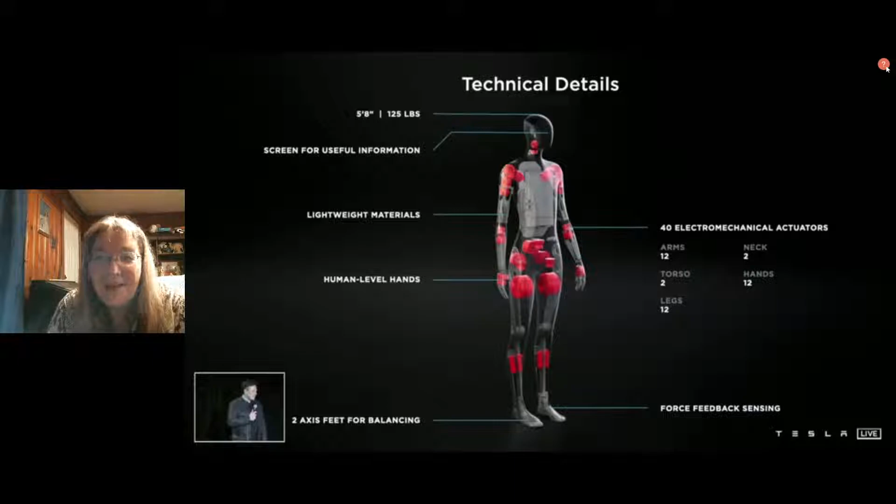It has a screen where the head is for useful information, but it's otherwise basically got the autopilot system in it. So it's got 8 cameras.

Full self-driving computer, making use of all of the same tools that we use in the car. Things I think are really hard about having a useful humanoid robot: can it navigate through the world without being explicitly trained, without line-by-line instructions? Can you talk to it and say, please pick up that bolt, attach it to the car with that wrench, and it should be able to do that. It should be able to go to the store and get groceries, that kind of thing, or put down the knife. So yeah, I think we can do that.

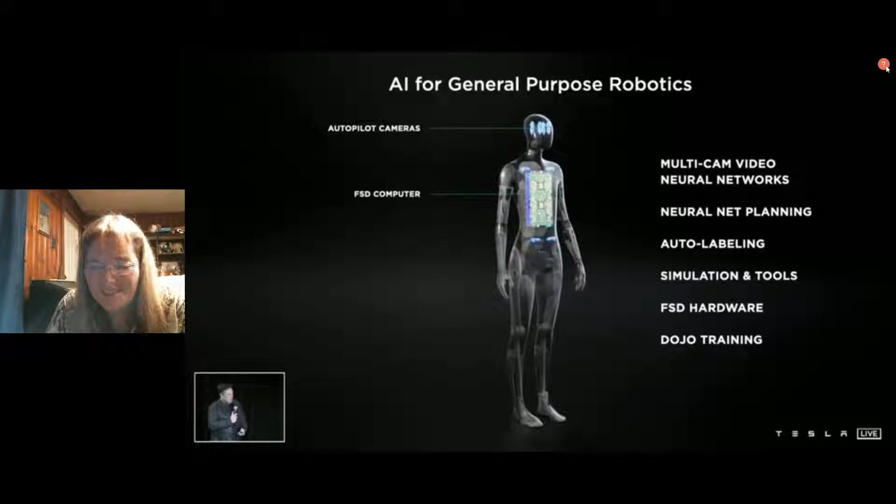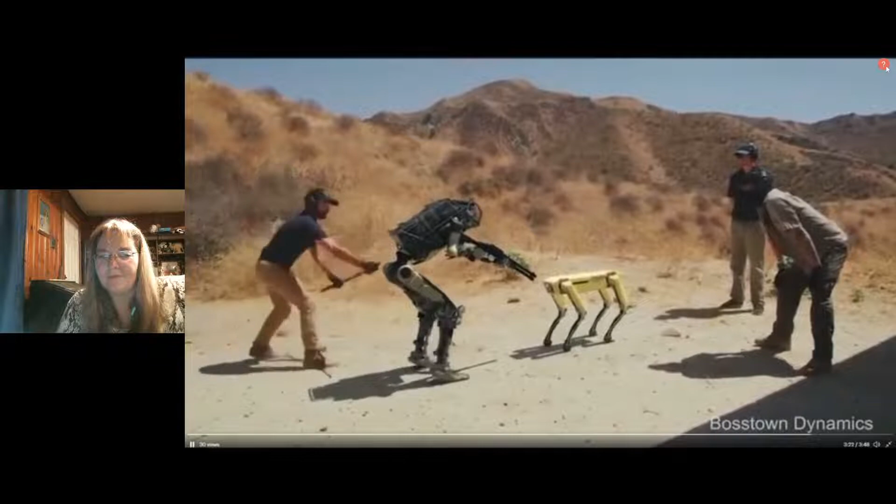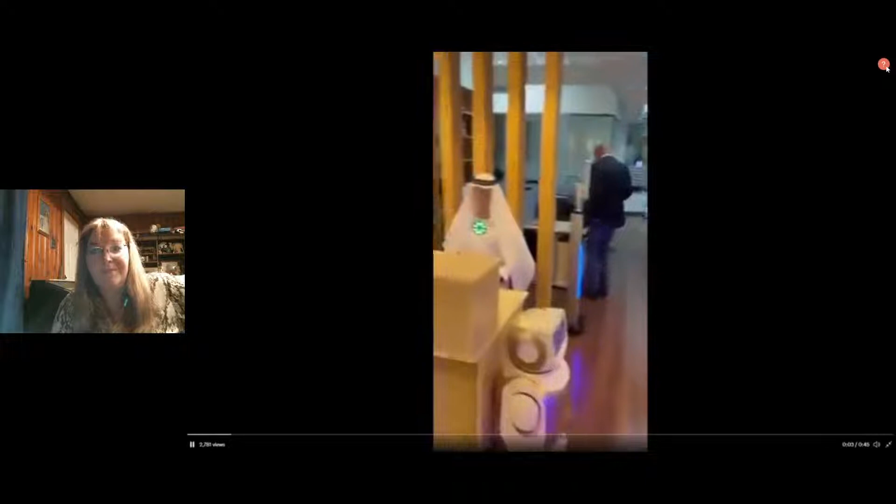Hello, guys, great to see you, my friend. Whoa, whoa, whoa, what is your name? Mister, what is your name? Did you hear that? He looks cross-eyed. Okay, what is your name? You can call me pretty boy. Pretty boy.

A lot of awesome robots.

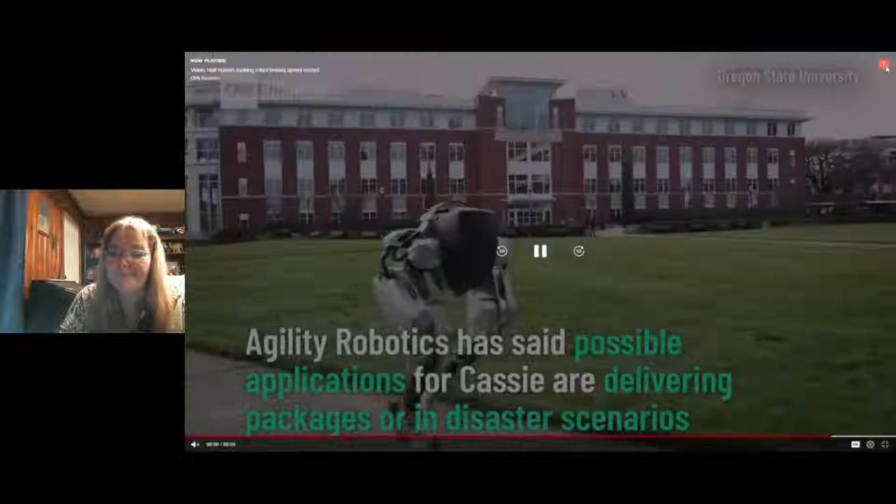So far below them in intelligence that it would be like a pet, basically, like a cat, like a house cat. So honestly, that would be the benign scenario. I don't love the idea of being a house cat. But that, so what's the...

Bear with me, is it going? Let's see, if I stop recording, it might stop some stuff from happening. Is it working yet? Let me just go here. See what it's doing. Uh-oh, yep. Oh, okay, here he is. Okay, let me go to speed 1.25. He is coming on live now, so we'll watch the rest of mine in a minute.

Looks like a bunch of young people, mind controlled college kids. All right, welcome everybody. Let's give everyone a moment to get back in the audience.

It says I love you. All right, I knew it. Welcome to Tesla AI Day 2022. Let me have it bring you some flowers. We've got some really exciting things to show you. I think you'll be pretty impressed.

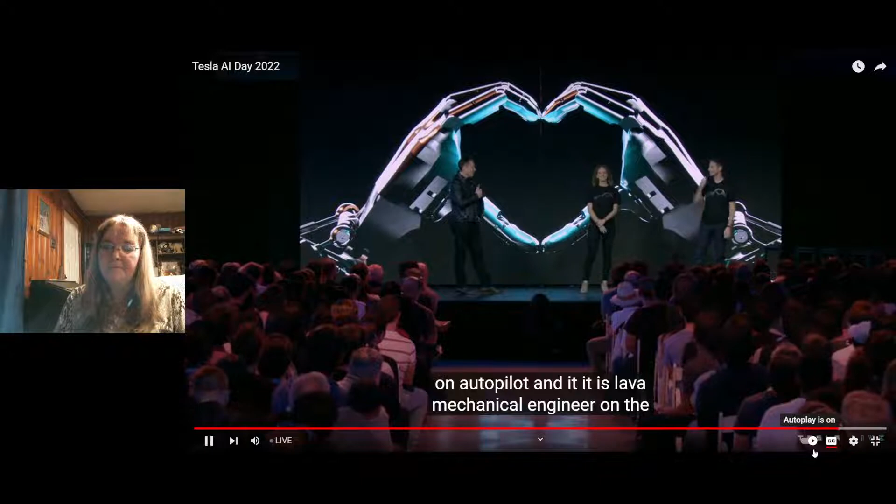So let's see, with that, do you guys want to say anything? Hey guys, I'm Milan, I work on Autopilot and the Tesla bot. And I'm Lizzie, mechanical engineer on the project as well. Okay, so should we bring up the bot?

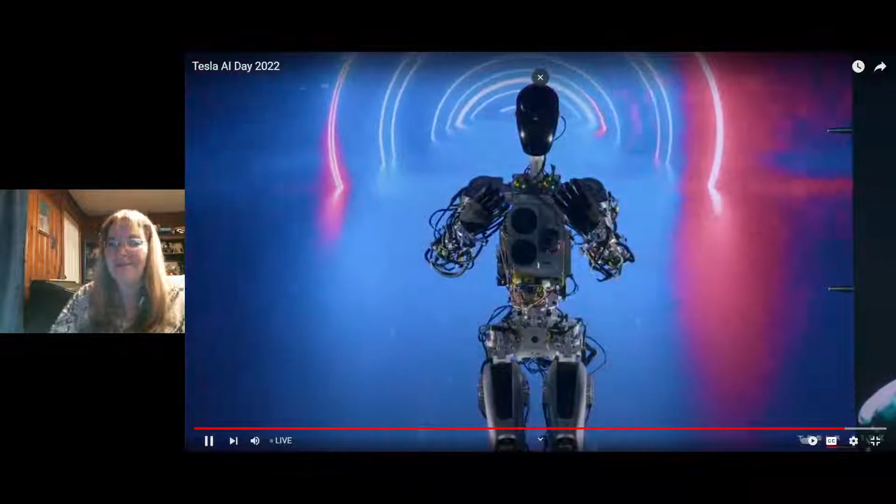Before we do that, we have one little bonus tip for the day. This is actually the first time we try this robot without any backup support - no cranes, mechanical mechanisms, cables, nothing. I want to do it with you guys tonight, but it's the first time, so let's see. You ready? Let's go. Okay, I'm gonna put it in normal time here. That's it. Creepy.

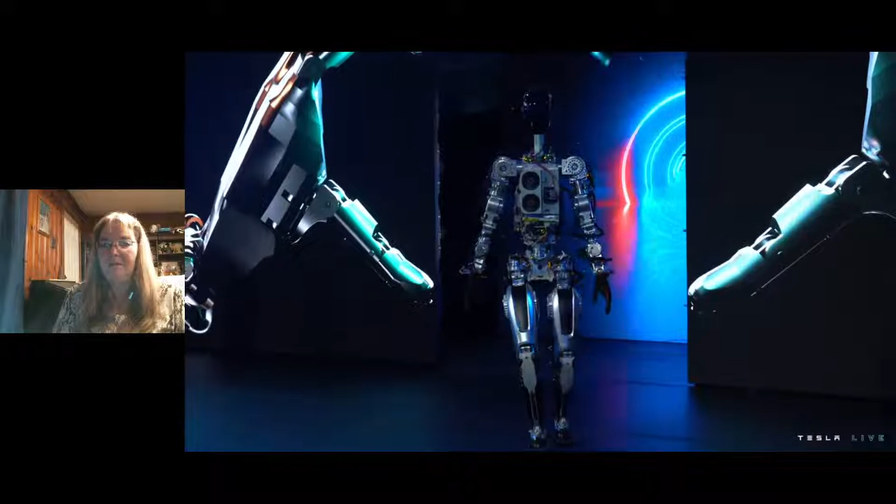Can we put some clothes on it? They're joking us. I think the bot got some boobs too.

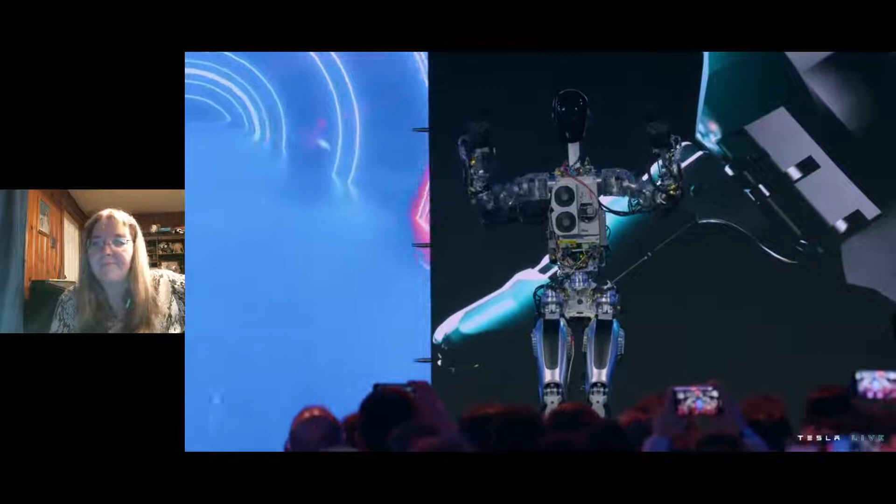I think they just slowed it down. This is essentially the same full self-driving computer that runs in your Tesla cars, by the way.

This is literally the first time the robot has operated without its tether. It was on stage praying tonight. Mantis. I'm creeped out.

So the robot can actually do a lot more than we just showed you. We just didn't want it to fall on its face. So we'll show you some videos now of the robot doing a bunch of other things.

Which are less risky. We should close the screen, guys. Come on, you've seen Boston Dynamics, right? Come on.

Yeah, we wanted to show a little bit more what we've done over the past few months with the bot, just walking around and dancing on stage. So in other words, you're not doing as good as Boston Dynamics.

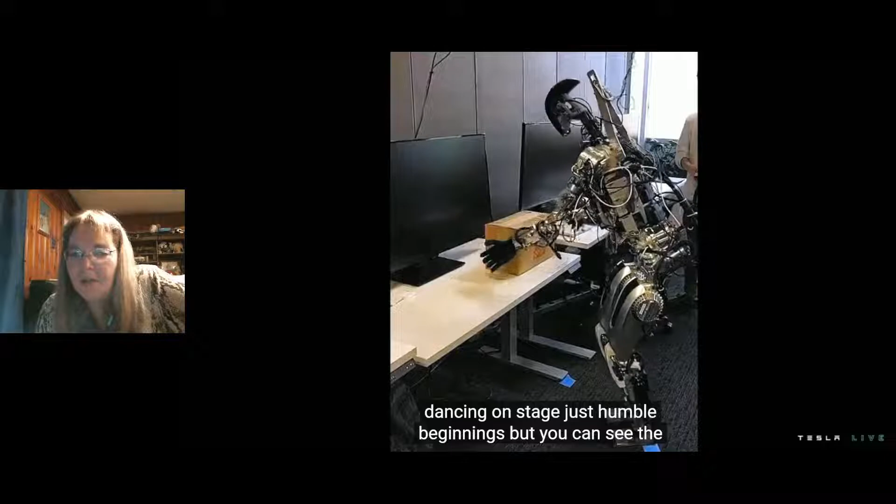Just humble beginnings, but you can see the autopilot neural networks running as is, just retrained for the bot directly on that new platform. That's my watering can.

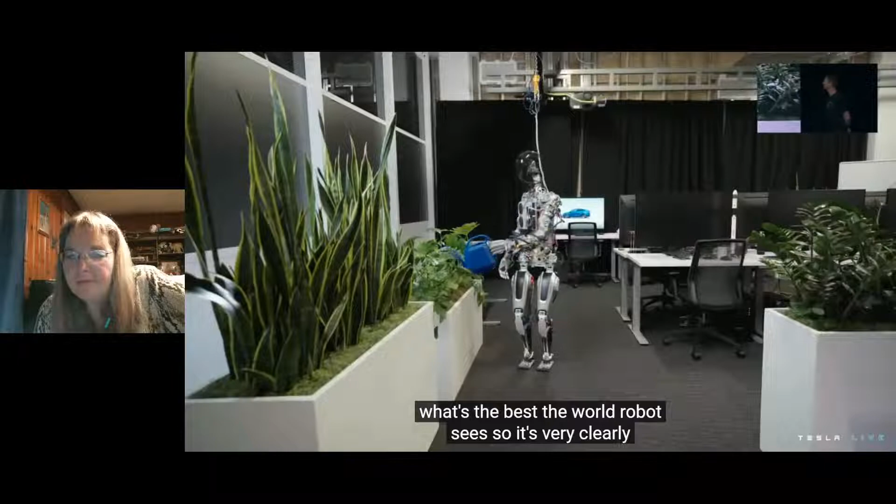Yeah, when you see a rendered view, that's the robot. That's the world the robot sees. So it's very clearly identifying objects. Like this is the object it should be picking up.

What are you guys saying? What do you think? We use the same process for autopilot to collect data and train neural networks that we then deploy on the robot.

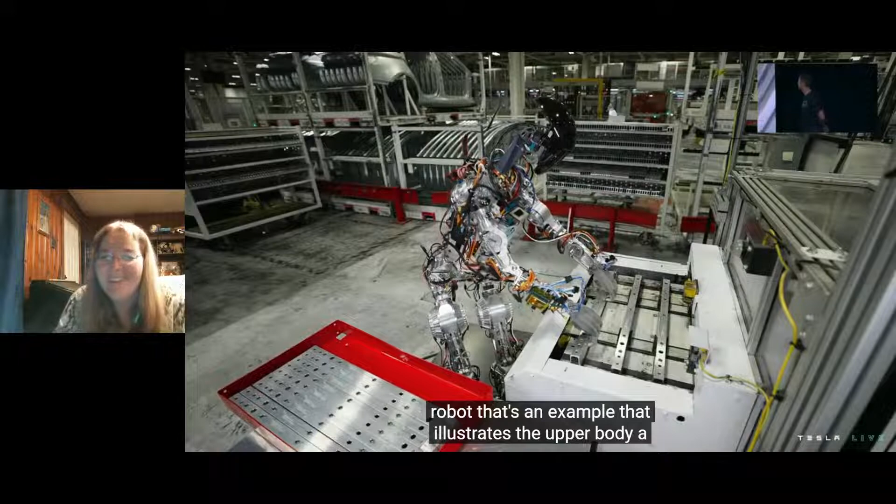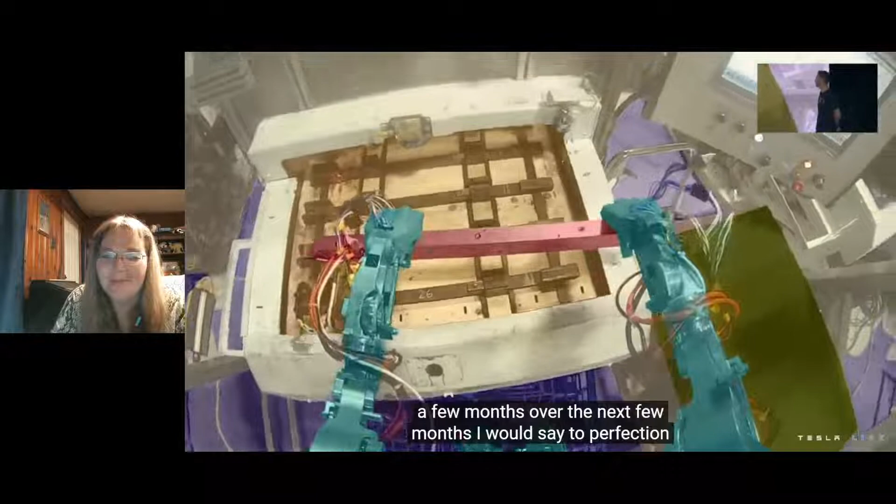Yep. So. Is that it? And that's not the only thing we have to show today, right? Yeah, absolutely.

What you saw was what we call Bumble C. That's our sort of rough development robot using off-the-shelf actuators. But we actually have gone a step further than that already.

The team's done an incredible job. And we actually have an Optimus bot with fully Tesla-designed and built actuators, battery pack, control system, everything. It wasn't quite ready to walk, but I think it will walk in a few weeks. But we wanted to show you the robot, something that's actually fairly close to what will go into production, and show you all the things it can do.

So let's bring it out. Do it. Okay, well now at least it's got a shirt on.

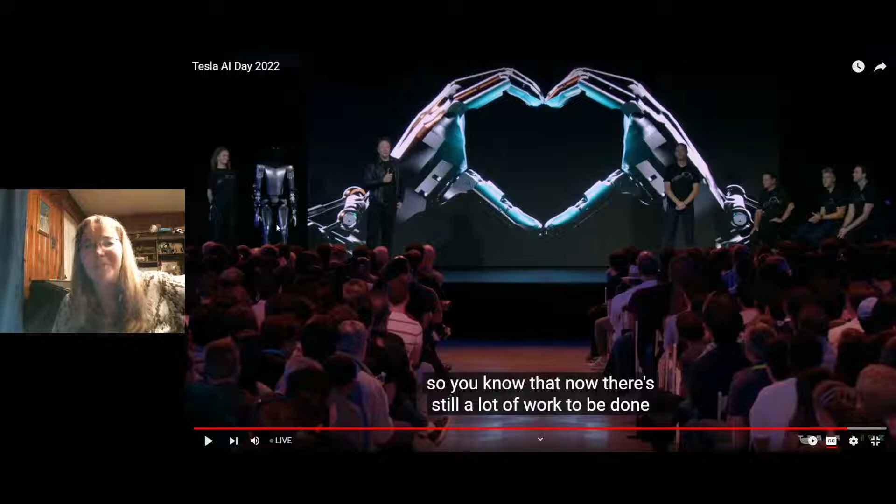These are the robots, the robots that in that movie I, Robot, the ones that are in the little housing units, the little semi-truck beds or whatever, the containers. These are the ones that are going to get beat the crap out of when Boston Dynamics comes after them.

So, now there's still a lot of work to be done to refine Optimus and improve it. Obviously, this is just Optimus version 1. And that's really why we're holding this event, which is to convince some of the most talented people in the world, like you guys, to join Tesla and help make it a reality and bring it to fruition at scale such that it can help millions of people.

And the potential, like I said, really boggles the mind, because you have to ask, what is an economy? An economy is sort of productive entities times their productivity, capita times productivity per capita. At the point at which there is not a limitation on capita, it's not clear what an economy even means at that point. An economy becomes quasi-infinite.

So, what taken to fruition in the hopefully benign scenario, this means a future of abundance, a future where there is no poverty, where you can have whatever you want in terms of products and services. It really is a fundamental transformation of civilization as we know it.

Obviously, we want to make sure that transformation is a positive one and safe. But that's also why I think Tesla as an entity doing this, being a single class of stock, publicly traded, owned by the public, is very important and should not be overlooked. I think this is essential because then if the public doesn't like what Tesla's doing, the public can buy shares in Tesla and vote differently. This is a big deal. It's very important that I can't just do what I want. Sometimes people think that, but it's not true.

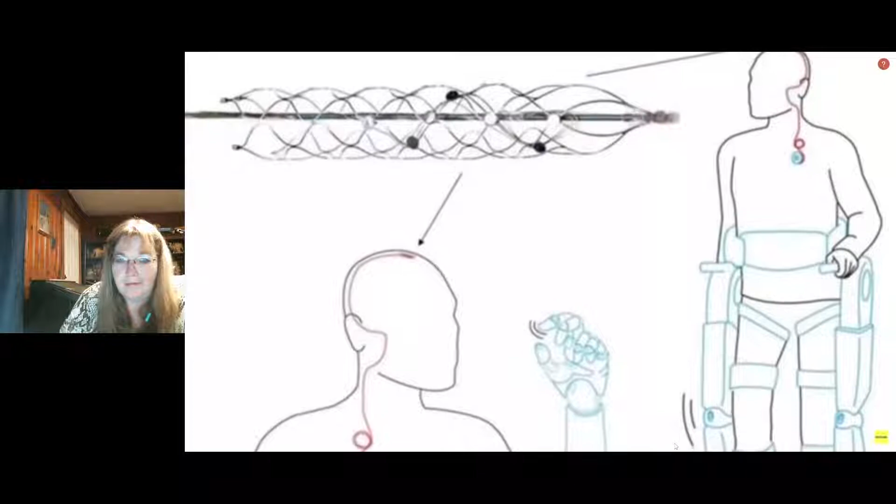Eliza Strickland from spectrum.ieee.org wrote an article that got neural research experts' thoughts on Elon Musk's Neuralink. Neurologist and CEO of Synchron, Thomas Oxley, invented the Stentrode, a neural probe that can be delivered to the brain through blood vessels, planning its first clinical trial for 2018 in Australia. Oxley says if Neuralink is working on a similar delivery system as the Stentrode, it will take a long time to get to the point where Synchron is at.

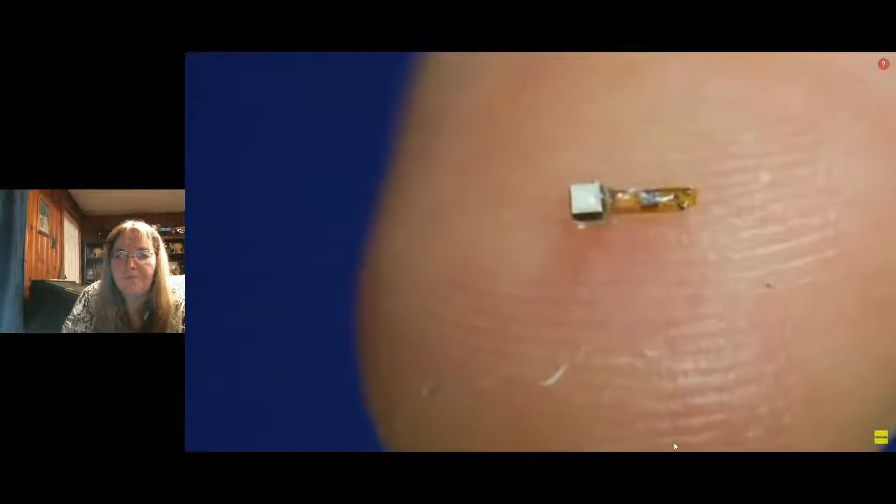It took Synchron 2 years working with sheep to deliver the catheter delivery system alone. Electrical engineer and professor at Berkeley, Michael Maharbiz, is working on neural dust, wireless electrodes that can be scattered throughout the nervous system to record signals. The obstacles Maharbiz is facing include circuit design, materials, communication schemes, and power, and he says developing neural dust is a difficult multi-year endeavor.

Based on the experts, Neuralink is not trying to do something impossible, but it sure is a moonshot.

Remember at the beginning when I said Neuralink was founded by 8 other people? Those 8 other founders are actually a super team of talent that hopes to make neural lace a reality. There is Flip Sabes, a UC San Francisco professor who has worked on brain-machine interfaces. There is Ben Rapoport, a neurosurgeon with a PhD in electrical engineering and computer science from MIT. DJ Seo, who studies at UC Berkeley and designs brain-machine interface concepts. Paul Merolla, who has designed more than 10 brain-inspired chips.

Vanessa Tolosa, a researcher of biocompatible materials at the Lawrence Livermore National Laboratory. Max Hodak, who worked on brain-machine interface technology while at Duke. Tim Hanson, a researcher at the Berkeley Sensor and Actuator Center. And Tim Gardner, a professor of biology at Boston University who has worked on brain-machine interfaces in birds. Neuralink has an impressive talent pool in the co-founders alone, and this doesn't even account for any scientists they hire.

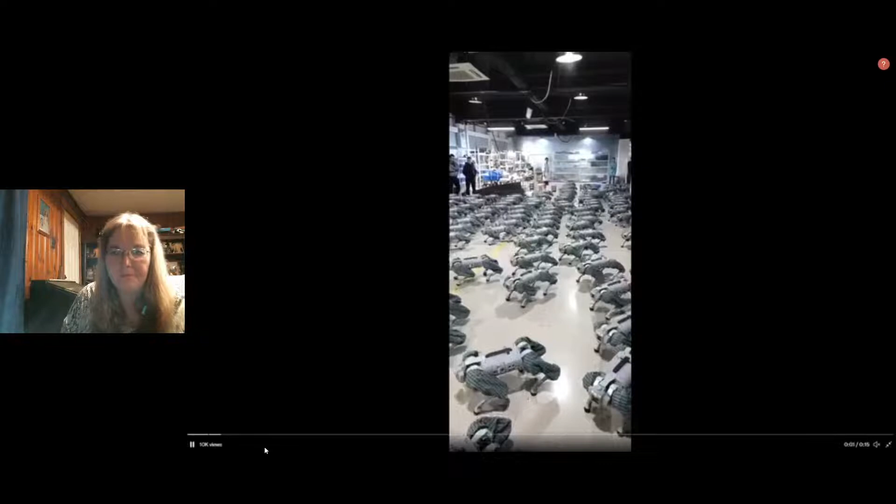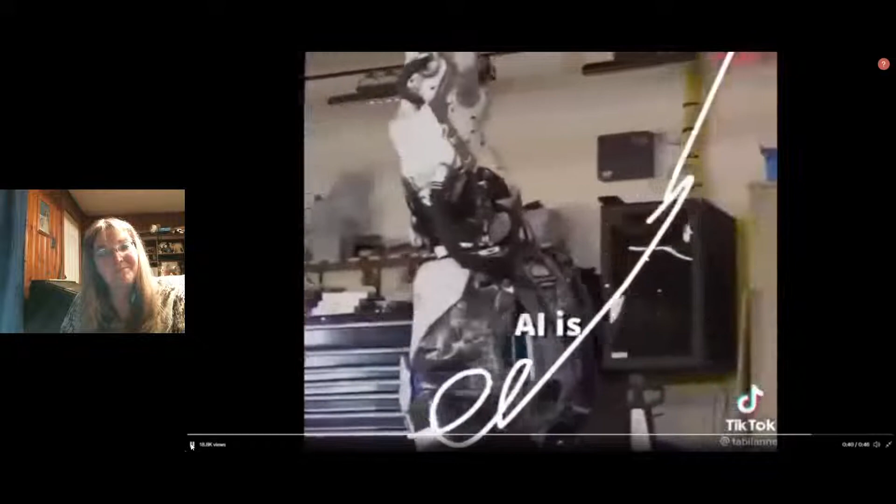At a top robotics company in Japan this week, 4 robots being developed for military applications killed 29 humans in the lab, shooting what was called metal bullets. The scariest part is that lab workers deactivated 2 of the robots and took apart the 3rd, but the 4th robot began restoring itself and somehow connected to an orbiting satellite to download information about how to rebuild itself even more strongly than before. Mark my words, AI is far more dangerous than nukes. Far.

Satellites, huh? Like what is it, Starlink? Right?

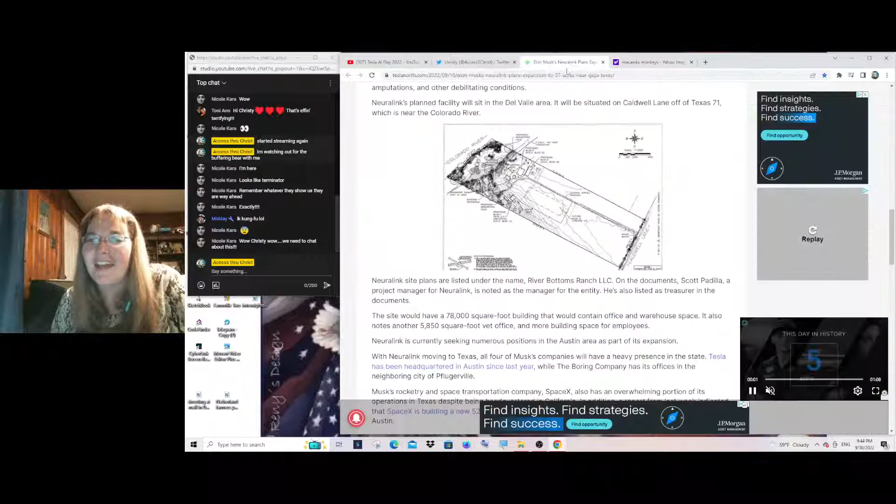Sounds funny. Anyway, what was I saying? I'm getting embarrassed. Okay, I was going to zoom in on this.

What is this? Near the Colorado River, and you heard him say there was a veterinarian office going in. Are they going to do some things with this Neuralink with some more animals? And what about the macaques? I still can't say that without laughing.

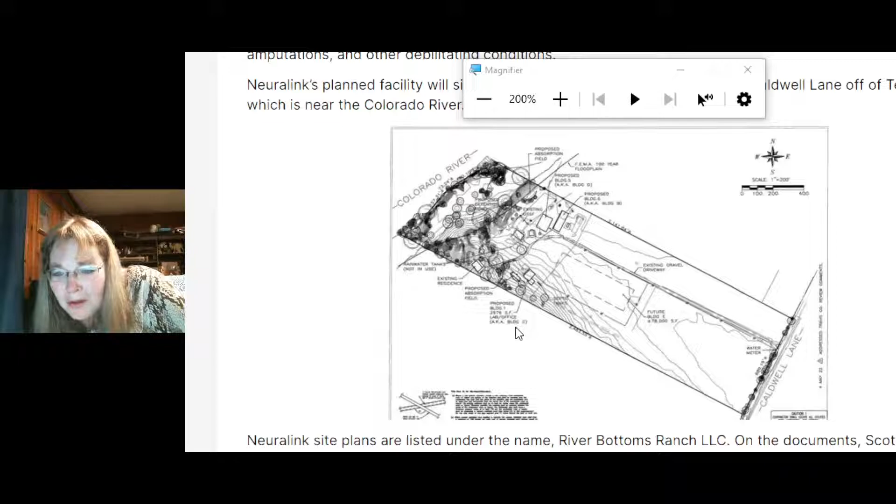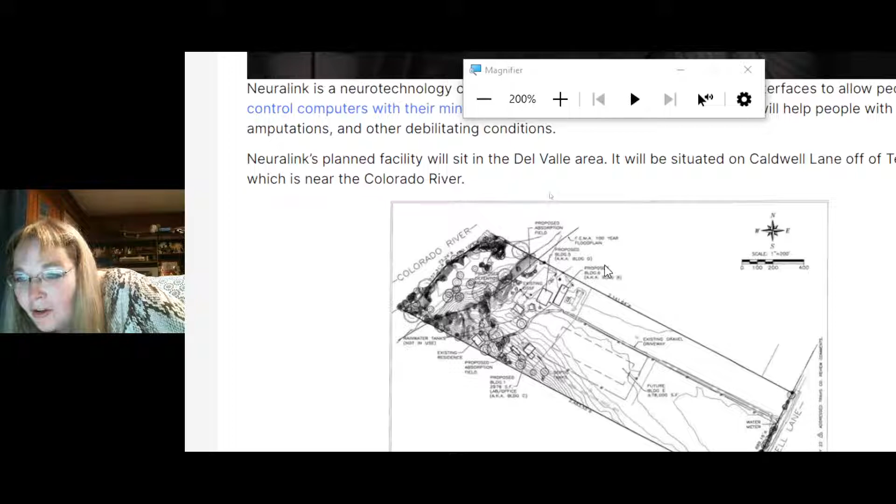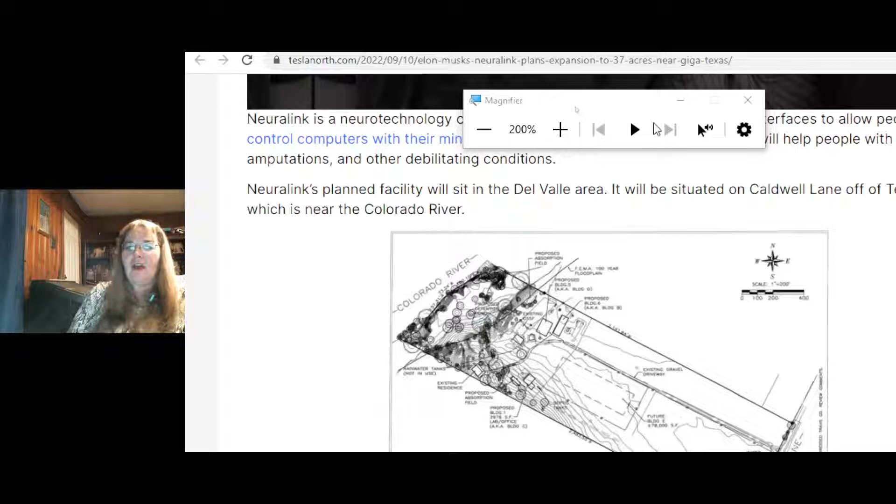Rainwater tanks, existing residence, proposed absorption field, proposed building, lab, office. FEMA - does that say FEMA? FEMA, 100-year floodplain. Another building, absorption field. Are they going to put their junk in the Colorado River or something?

Anyway, that's planned to sit in the Del Valle area, situated on Caldwell Lane, off Texas 71, which is near the Colorado River. Neuralink sites are listed under the name River Bottoms Ranch, LLC. Just giving up all the goods here. On the documents, Scott Padilla, project manager for Neuralink, is noted as the manager for the entity. He's also listed as treasurer in the documents.

It's expanding, they want to put Neuralinks in everybody through the vein. What is going on with all these people falling over dead? The one guy started twirling and fell into a moving train and got killed like that. But I think he was gonna die anyway, because I think that's what's happening with these people. It might be - I don't know, I'm not allowed to say.

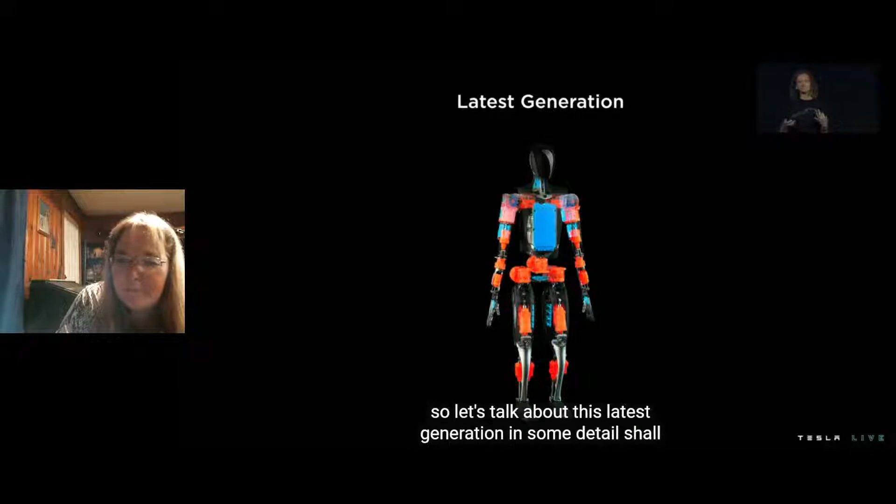So let's talk about this latest generation in some detail. On the screen here, you'll see in orange our actuators, which we'll get to in a little bit, and in blue our electrical system.

Now that we have our human-based research and our first development platform, we have both research and execution to draw from for this design. Again, we're using that vehicle design foundation, taking it from concept through design and analysis, then build and validation. Along the way, we're optimizing for things like cost and efficiency, because those are critical metrics to take this product to scale eventually. How are we going to do that?

We're going to reduce our part count and power consumption of every element possible. We'll reduce the sensing and wiring at our extremities — a lot of mass in your hands and feet is quite difficult and power consumptive to move around. And we're going to centralize both our power distribution and compute to the physical center of the platform. In the middle of our torso, we have our battery pack, sized at 2.3 kilowatt hours, which is perfect for about a full day's worth of work.

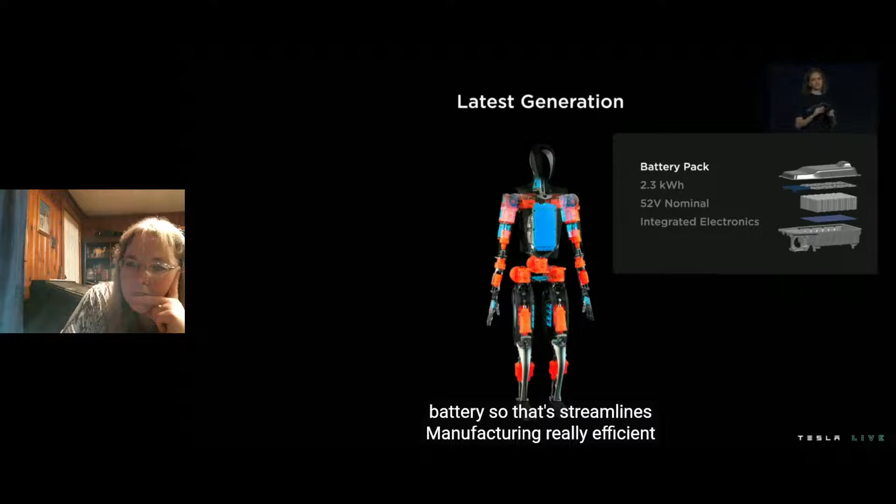What's really unique about this battery pack is it has all of the battery electronics integrated into a single PCB within the pack. That means everything from sensing to fusing, charge management, and power distribution is all in one place. We're also leveraging both our vehicle products and our energy products to roll all of those key features into this battery — streamlined manufacturing, efficient and simple cooling methods, battery management, and safety. And of course, we can leverage Tesla's existing infrastructure and supply chain to make it.

Why don't we talk about Tesla technology, like free energy and how you could utilize that with a robot where it didn't need a battery. How about that? I think we're the batteries, guys. I think that's the whole thing. This is just a distraction, a promise — like you're not going to be the slave. These things are going to be the slave.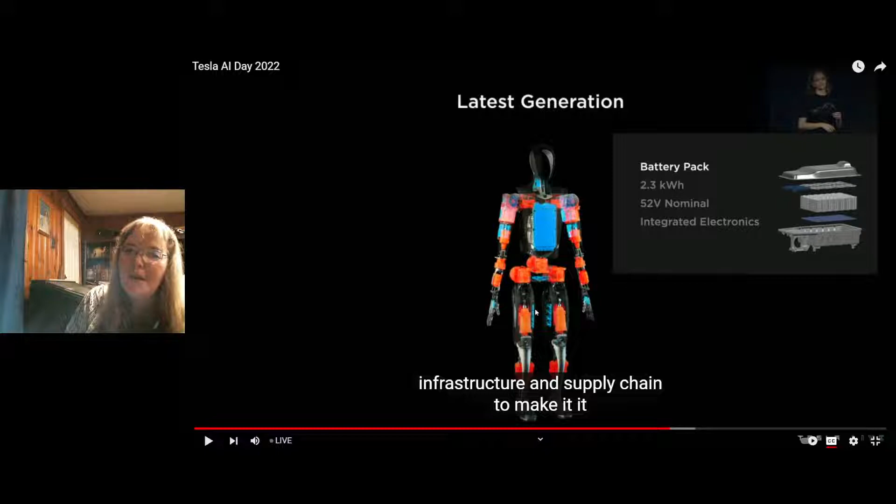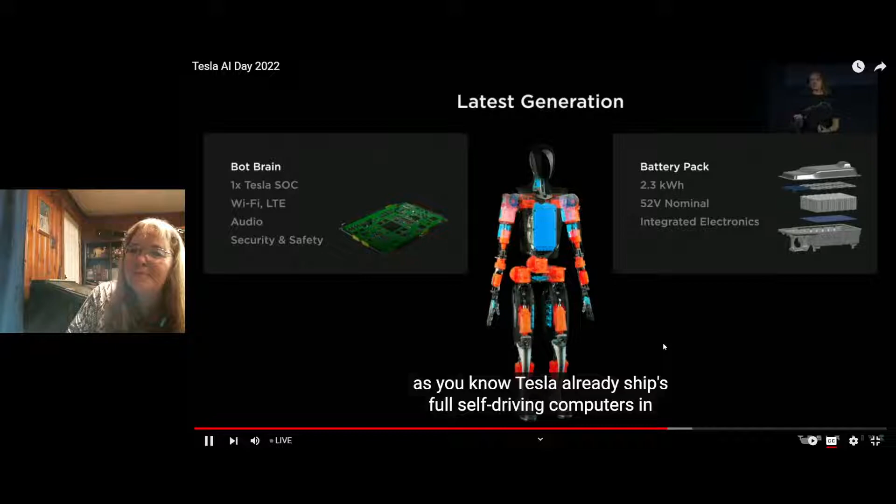Going on to our brain — it's not in the head, but it's pretty close. Also in our torso, we have our central computer. As you know, Tesla already ships full self-driving computers in every vehicle we produce. We want to leverage both the autopilot hardware and software for the humanoid platform, but because it's different in requirements and form factor, we're going to change a few things first.

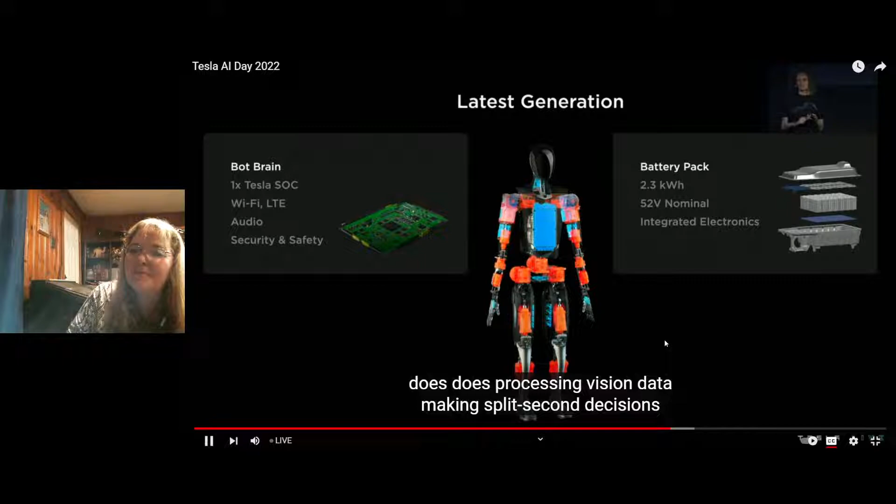It's still going to do everything that a human brain does — processing vision data, making split-second decisions based on multiple sensory inputs, and also communications. To support communications, it's equipped with wireless connectivity as well as audio support.

And then it also has — I don't know about you guys, but I can't get my computers to last more than three years. So, you know, what's going to happen?

And it can't get wet or be around water. Hey, that's kind of a good thing, right? Like if we needed to malfunction one of them, water's something to think about.

Hardware level security features, which are important to protect both the robot and the people around the robot.

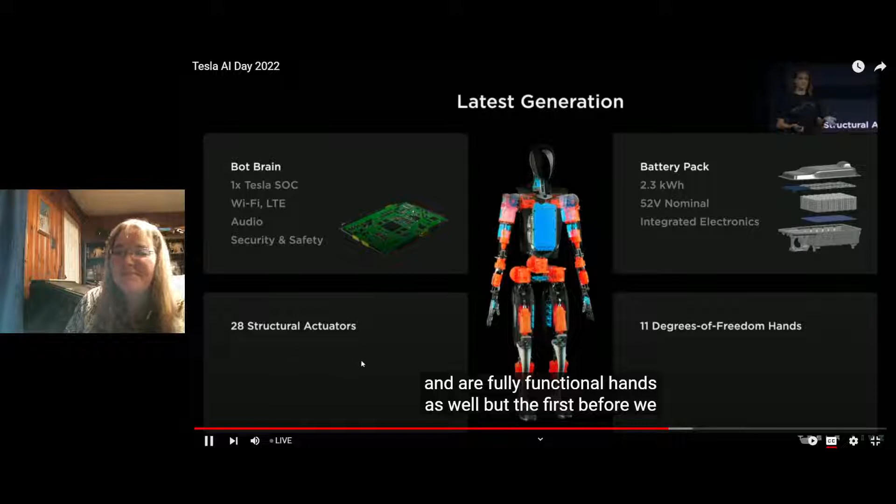And we'd love to show you a little bit about our actuators and our fully functional hands as well. But before we do that, I'd like to introduce Malcolm, who's going to speak a little bit about our structural foundation for the robot.

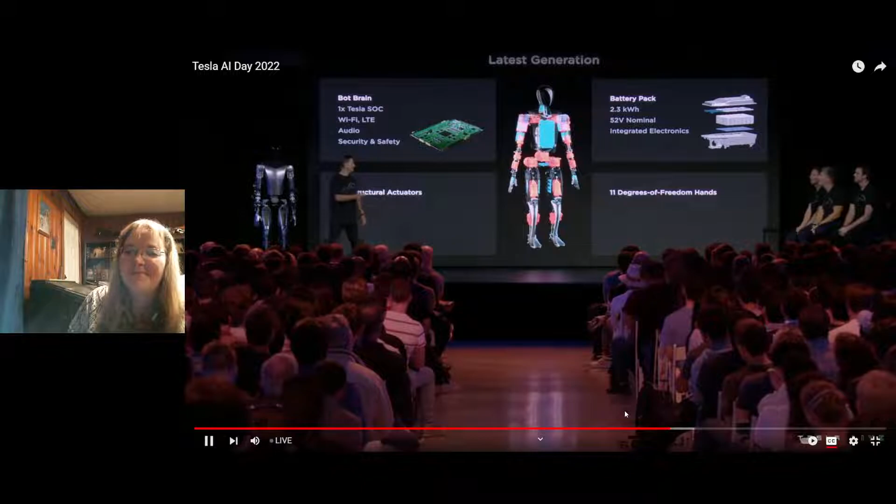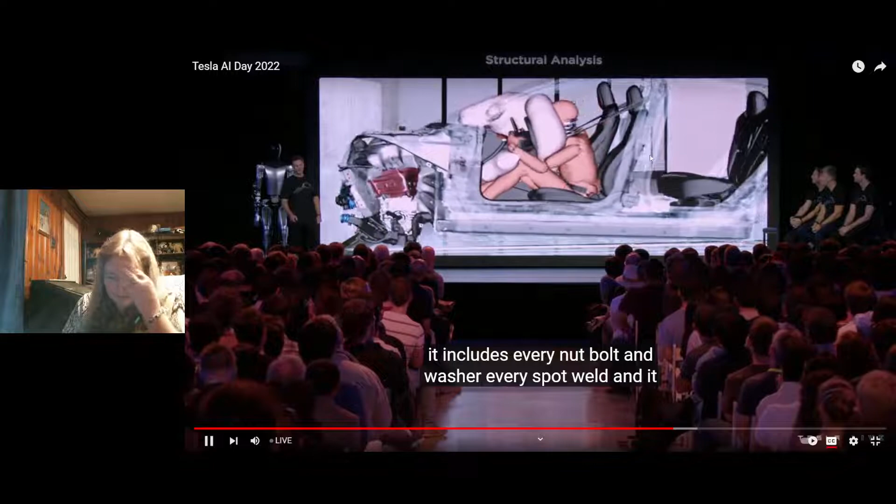Tesla have the capability to analyze highly complex systems. They don't get much more complex than a crash. You can see here a simulated crash from Model 3 superimposed on top of the actual physical crash. It's incredible how accurate it is. Just to give you an idea of the complexity of this model, it includes every nut, bolt, and washer, every spot weld, and it has 35 million degrees of freedom. Quite amazing. And it's true to say that if we didn't have models like this, we wouldn't be able to make the safest cars in the world.

So can we utilize our capabilities using the motions to the tasks we want the robots to do? These tasks are picking up boxes, turning, squatting, walking upstairs. Whatever the set of tasks are, we can place in the model. This is showing just simple walking. We can create the stresses in all the components that helps us optimize the components.

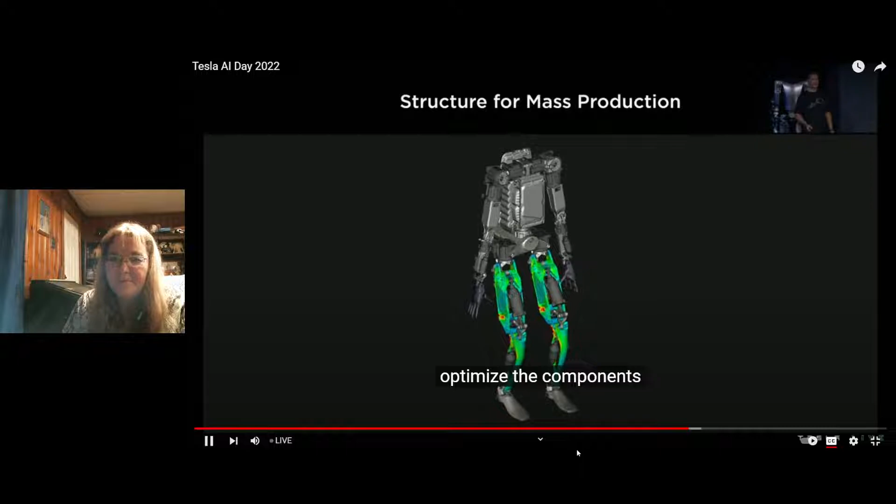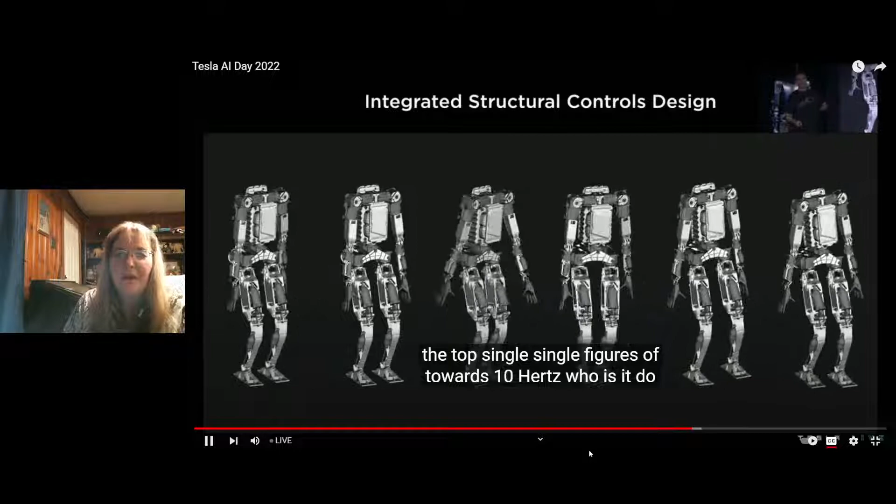These are not dancing robots. These are actually the modal behavior, the first 6 modes of the robot. Typically, when people make robots, they make sure the first mode is up around 10 hertz. The way to do this is to make the controls of walking easier. It's very difficult to walk if you can't guarantee where your foot is wobbling around.

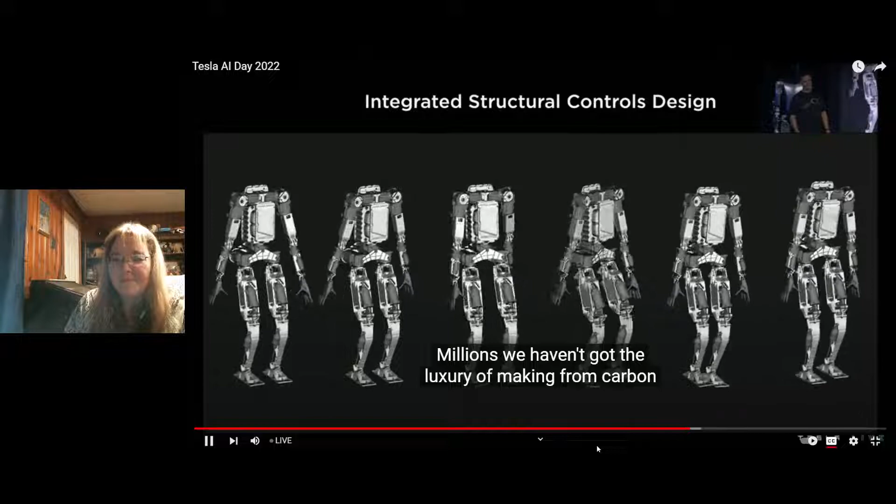That's okay to make one robot. We want to make thousands, maybe millions. We haven't got the luxury of making them from carbon fiber and titanium. We want to make them from plastic. Things are not quite as stiff, so we can't have these high targets. I call them dumb targets. We've got to make them work at lower targets.

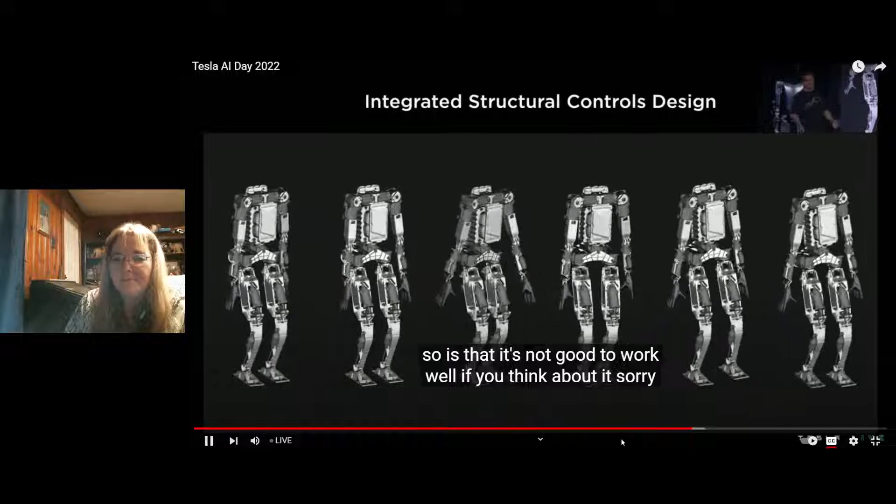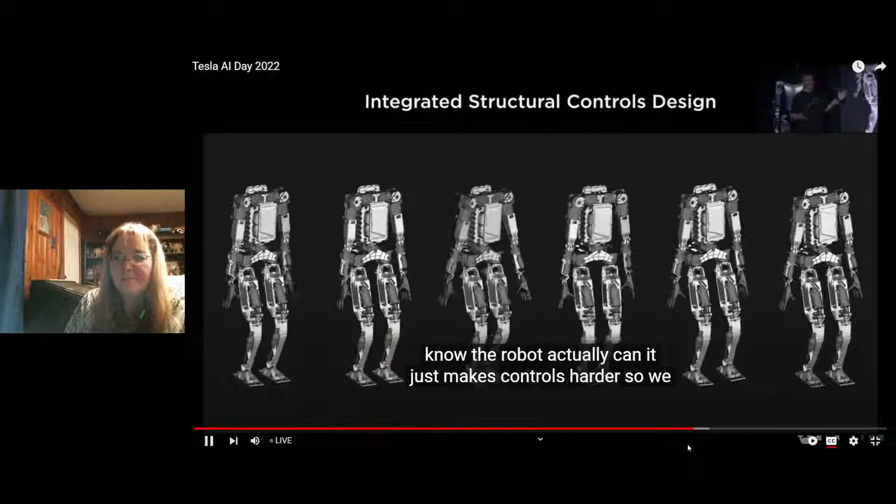So is that going to work? Well, if you think about it, we're just bags of soggy jelly and bones. We're not high frequency. If I stand on my leg, I don't vibrate at 10 hertz. People operate at low frequency, so we know the robot actually can - it just makes controls harder. So we take the information from this, the modal data and the stiffness, and feed that into the control system. That allows it to walk.

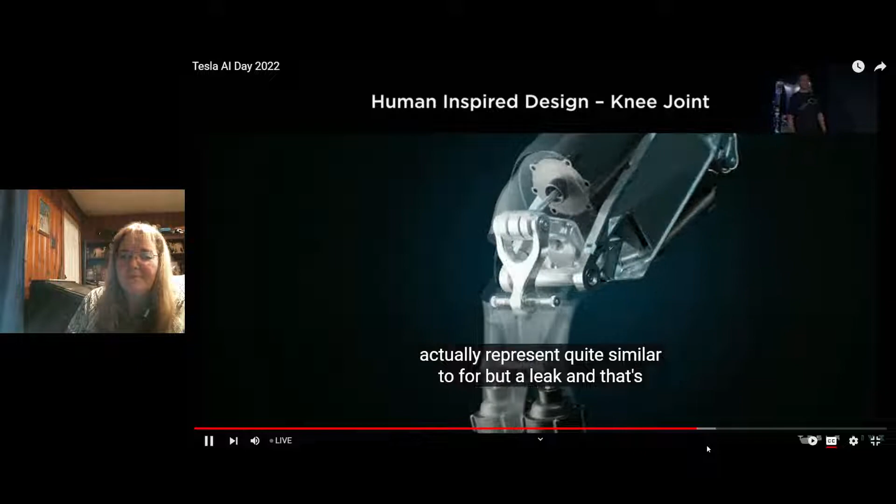Just changing tack slightly, looking at the knee. We can take some inspiration from biology, and we can look at what the knee is. It turns out it actually represents quite similar to a 4-bar link, and that's quite non-linear. That's not surprising, really, because when you bend your leg down, the torque on your knee is much more when it's bent than it is when it's straight. So you'd expect a non-linear function, and in fact, the biology is non-linear.

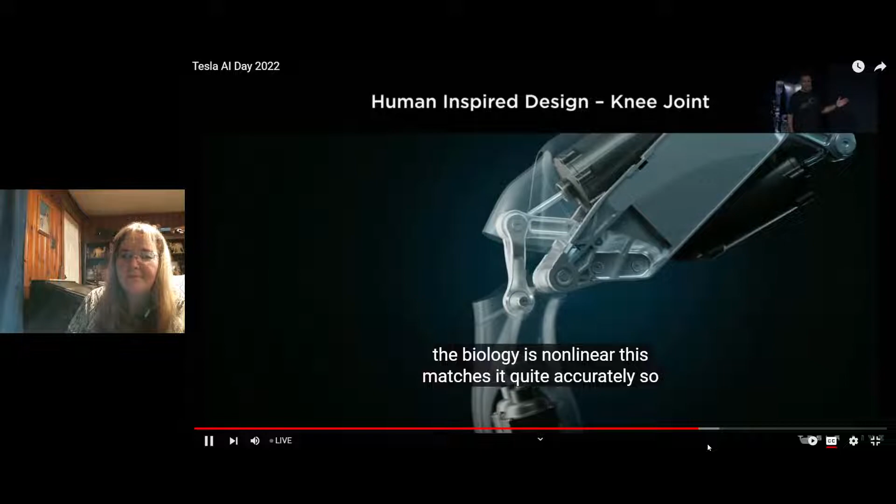This matches it quite accurately. So that's a representation - the 4-bar link is obviously not physically a 4-bar link, but the characteristics are similar. But me bending down, that's not very scientific. Let's be a bit more scientific.

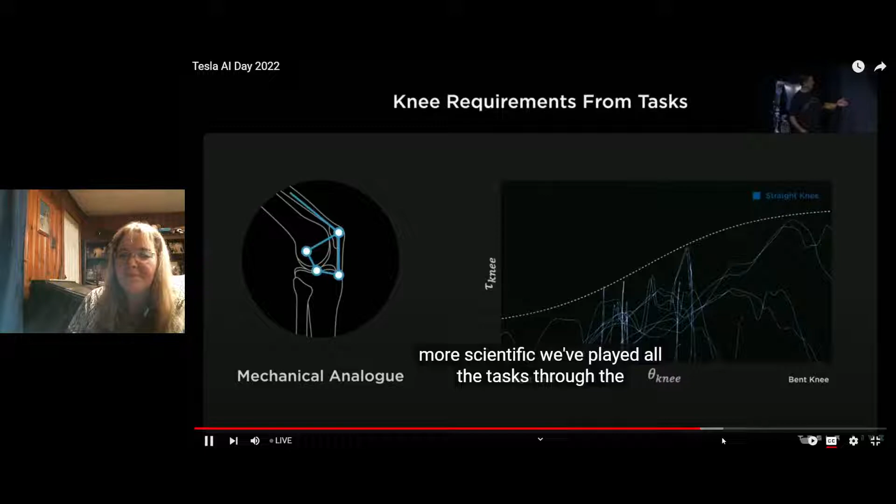We've played all the tasks through this graph, showing picking things up, walking, squatting - the tasks we used for the stress analysis. That's the torque seen at the knee against the knee bend on the horizontal axis.

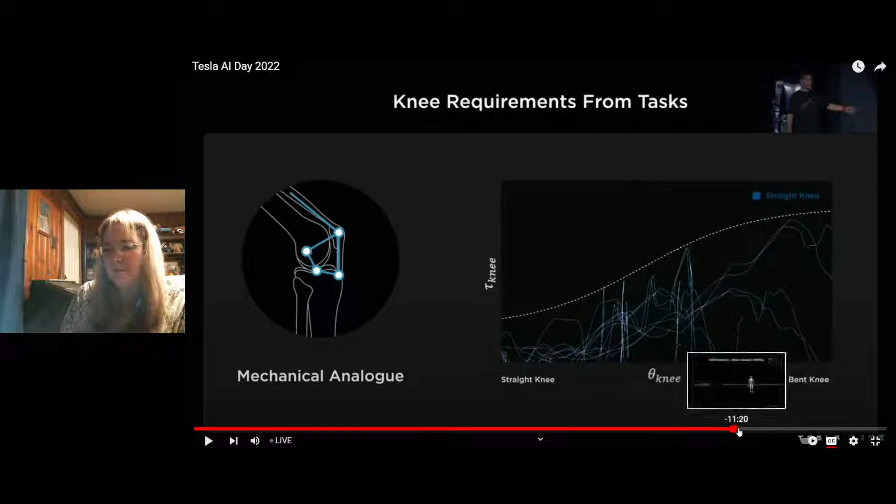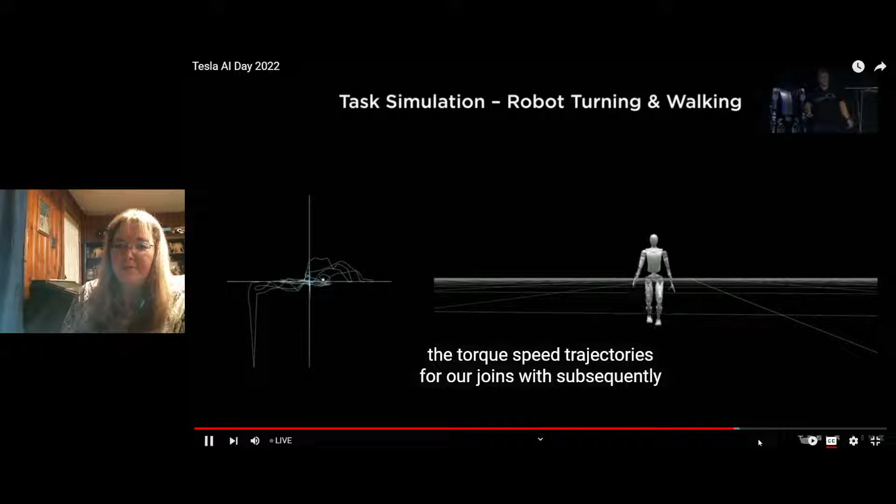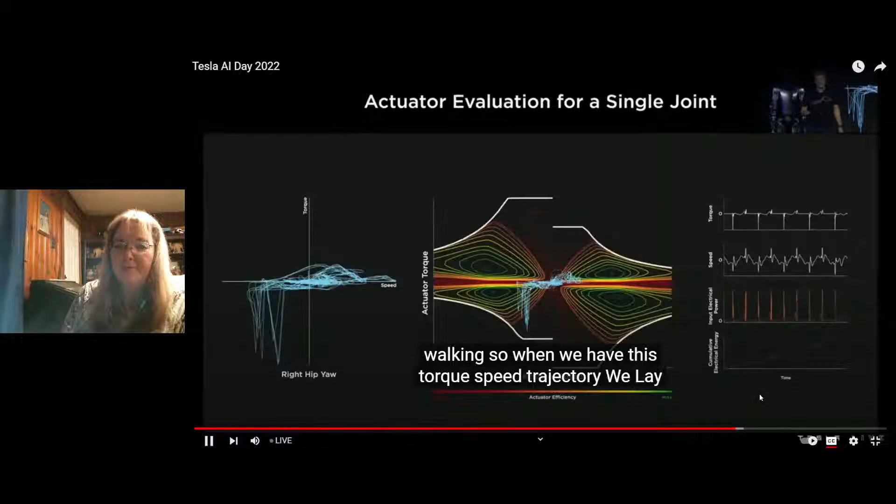This is one of the scenarios that the robot is capable of doing, which is turning and walking. So when we have this torque speed trajectory, we lay it over an efficiency map of an actuator, and we are able, along the trajectory, to generate the power consumption and the cumulative energy for the task.

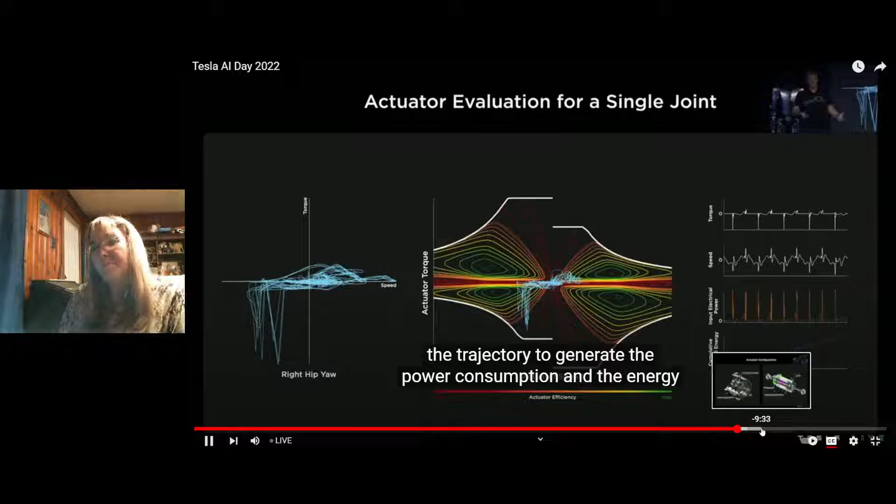The resulting portfolio is 6 actuators, shown in a color map. The actuators can be also viewed in this slide - we have 3 rotary and 3 linear actuators, all of which have a great design.

Because our muscles can do the same when they are directly driven.

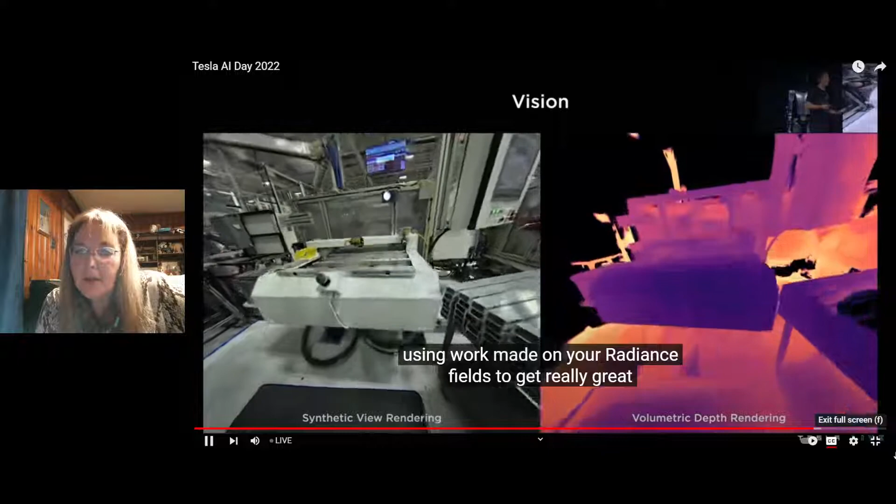Another interesting problem to think about is, in indoor environments, mostly without GPS signal, how do you get the bot to navigate to its destination, say for instance to find its nearest charging station?

So we've been training more neural networks to identify high-frequency features, key points within the bot's camera streams, and track them across frames over time as the bot navigates its environment.

We use our better bot model, we use the understanding of reality that we've gained through state estimation, and we compare what we want versus what we expect that reality is doing to us in order to add corrections to the behavior of the robot.

Here, the robot certainly doesn't appreciate being poked, but it does an admirable job of staying upright.

The final point here is a robot that walks is not enough. We need it to use its hands and arms to be useful. Let's talk about manipulation.

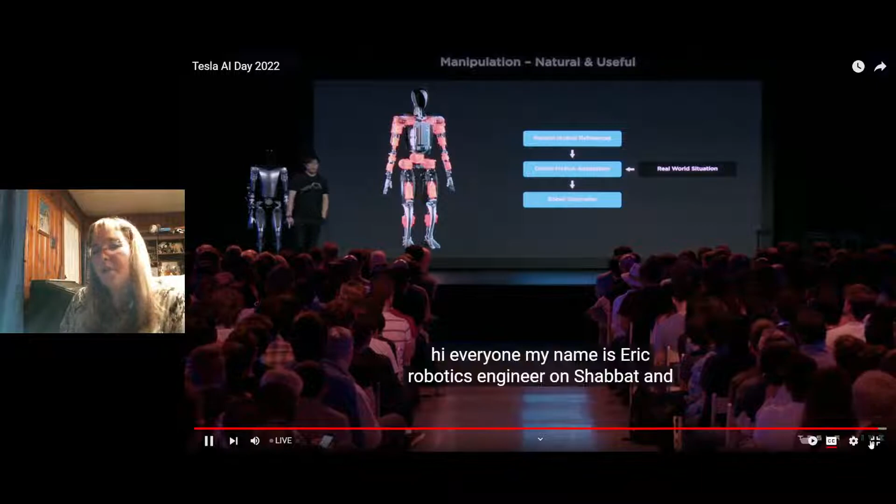And then you find out you're the one interfacing with the computer. So, yeah, there's the link. We should talk, yeah, Nicole. We should go over to Discord and talk. Wonder if Thomas is around. Let's go, let's see if he's in his server. That'd be fun.